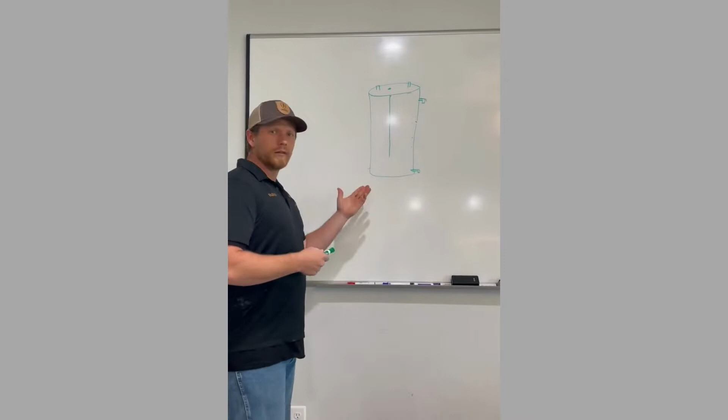Hello everybody. Today I want to go over a topic we get a lot of questions about in the field, and that's how often you should maintain your water heater, and why it's important to maintain it. So this is my drawing up here. Hopefully it's not too bad, and y'all can understand what I'm talking about.

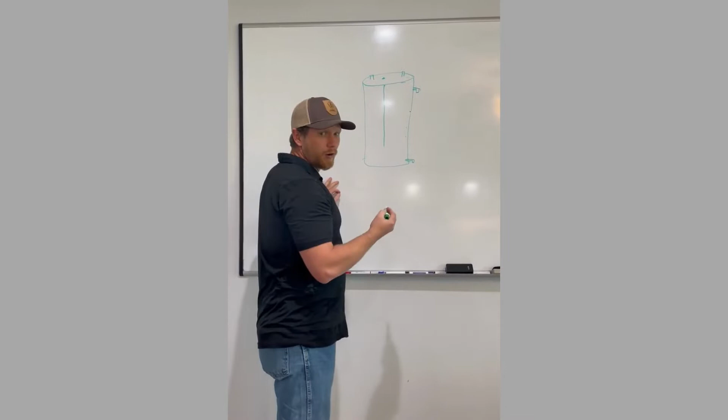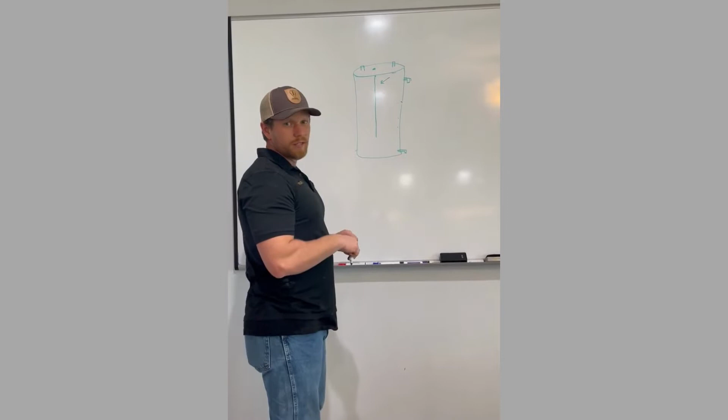Your water heater is actually a glass lined tank, and depending on how hard your water is and what minerals are in it, they like to stick to the sides of the tank. But that's what this rod is for. This is the anode rod, and it's a sacrificial rod. All the hard water minerals are attracted to this rod, and it sacrifices its life for the life of the tank. This needs to be checked and possibly replaced every 3 years, depending on how hard your water is, because when this rod is no good anymore, these minerals start attaching themselves to your tank.

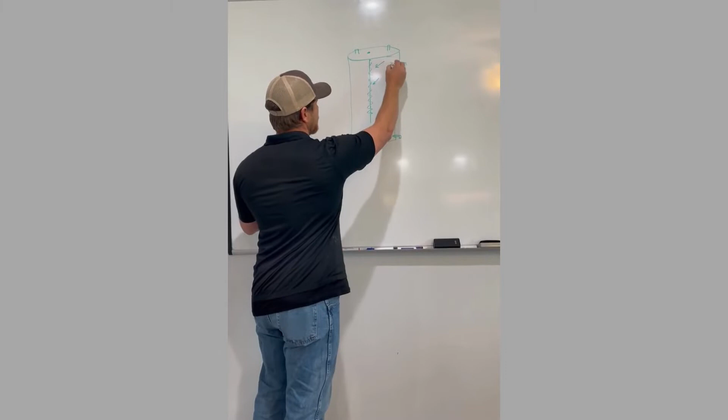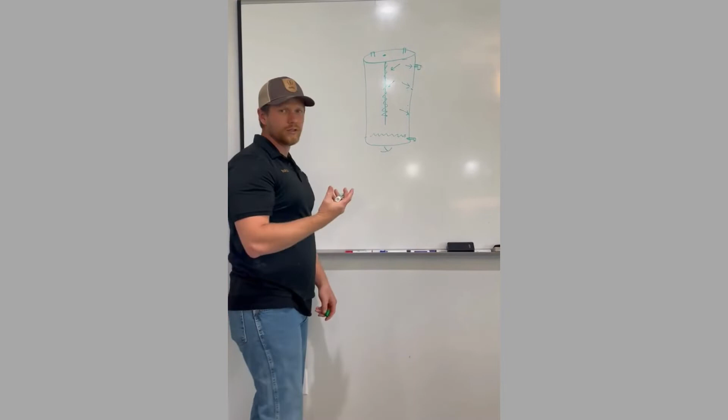That's when you have mineral buildup on the inside of the tank, and you really can't get it out once it starts sticking to the sides. It also builds up pretty heavy on the bottom, and since a gas heater is heated from the bottom, that decreases the efficiency of the heater. If you're heating and you hear a bunch of popping going on, that's what's happening. It's all the calcium popping up because of the heat underneath it, and you're really losing a lot of efficiency.

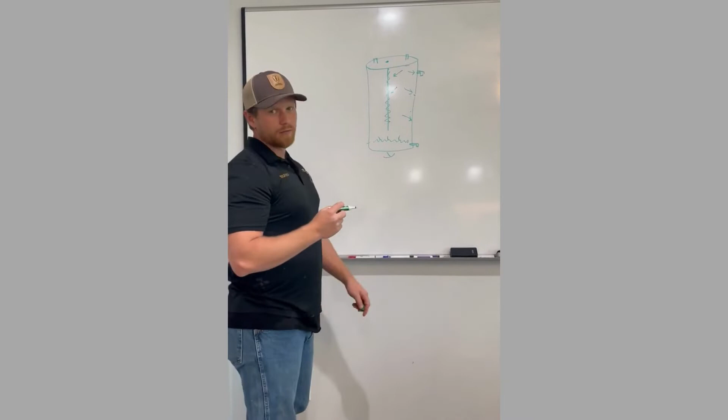So to maintain it properly, once a year you need to drain it with a hose here, drain this out. You also need, every 3 years, to pull this anode rod and replace it, and every 5 years you want to replace this temperature and pressure relief valve.

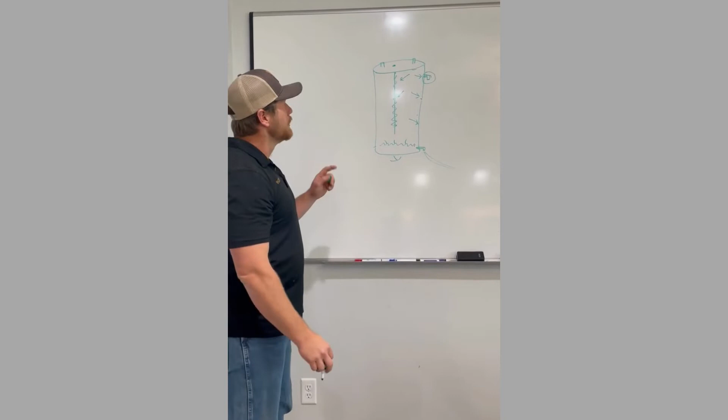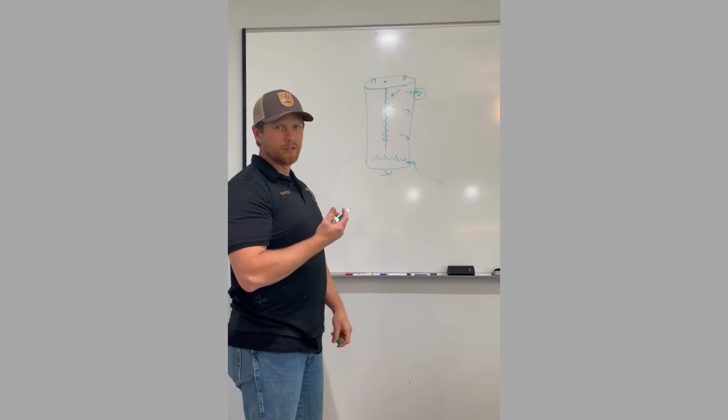This is a pretty important piece because this is actually what keeps the heater safe. A lot of people think heaters blowing up are mostly gas-related issues, but it's really not. It could happen gas or electric, and this valve is a pretty big piece of that happening. So I'll just kind of explain that real quick.

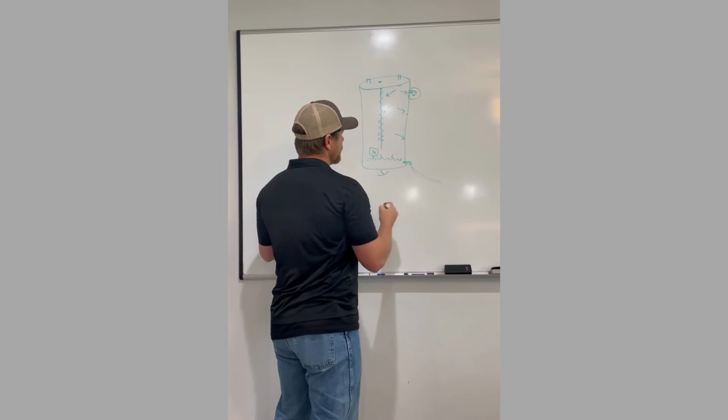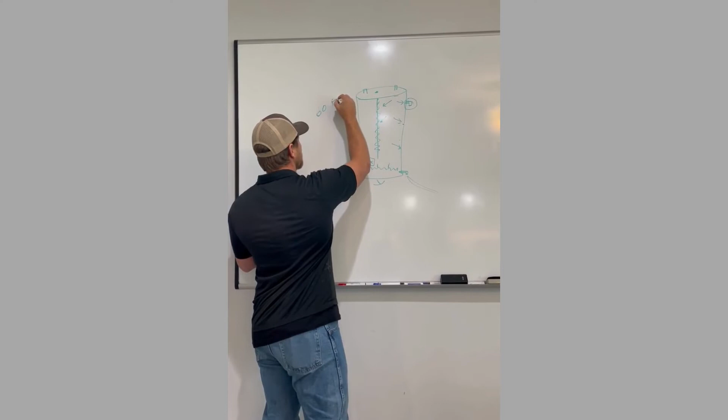Say you have a thermostat mess up. I have a gas thermostat here heating, and it messes up and starts heating the water. This water's pressurized in the tank. So say you've got 60 psi of water pressure - that means the water in this tank can get to about 287 degrees before it starts to boil.

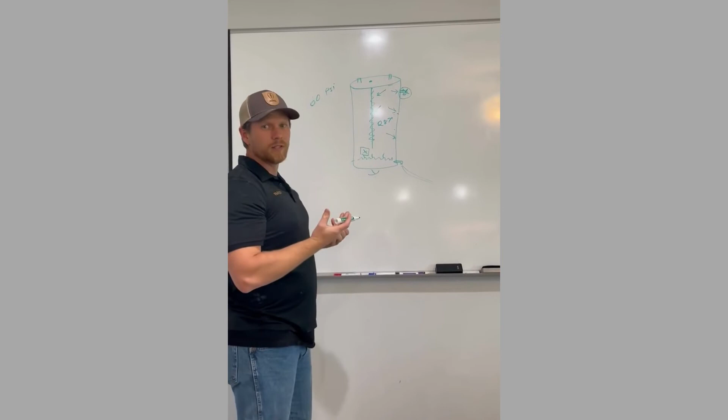If this messes up and it doesn't open at 210 like it's supposed to, this water is going to keep increasing in temperature because this isn't shutting off. If the tank ruptures while under that much pressure and that much heat, then all of this water, 50 gallons or 40, whatever you have, is going to turn to steam.

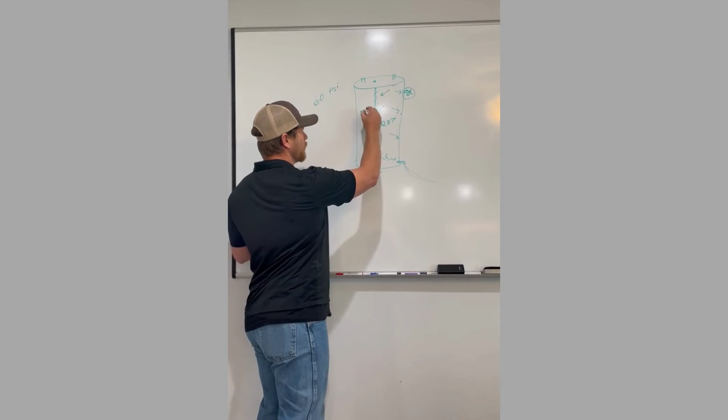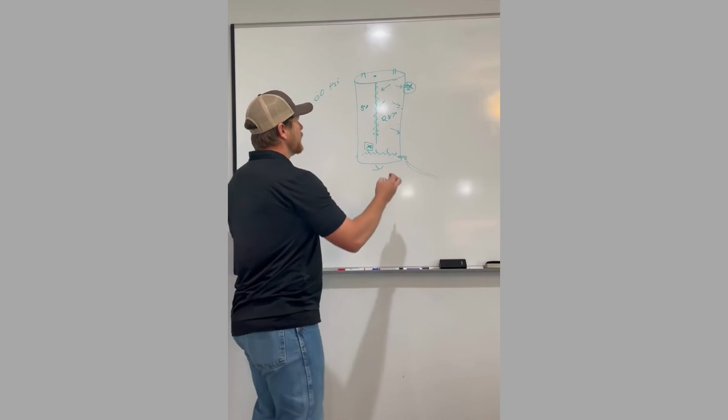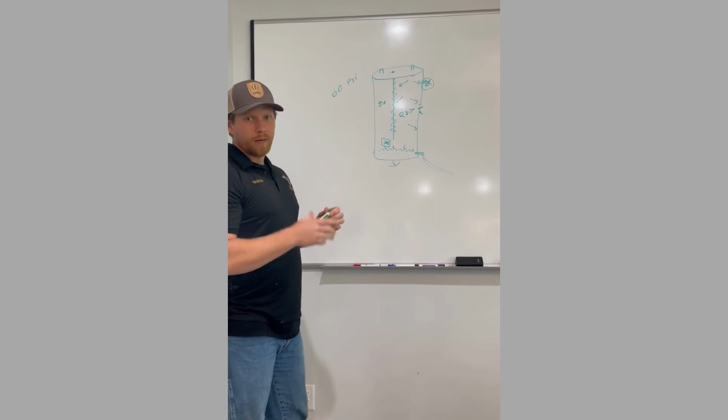The steam to water ratio is 1,600 to 1 - every gallon of water makes 1,600 gallons of steam. And when the tank ruptures and 50 gallons turns to steam, that's what causes water heaters to blow up. That's why it's important to make sure you maintain and properly install your water heaters. Thank y'all.